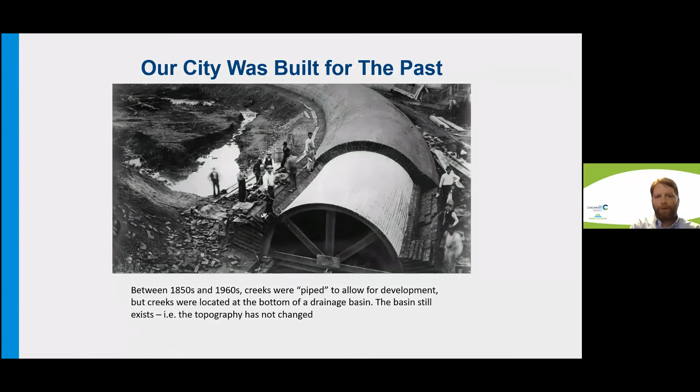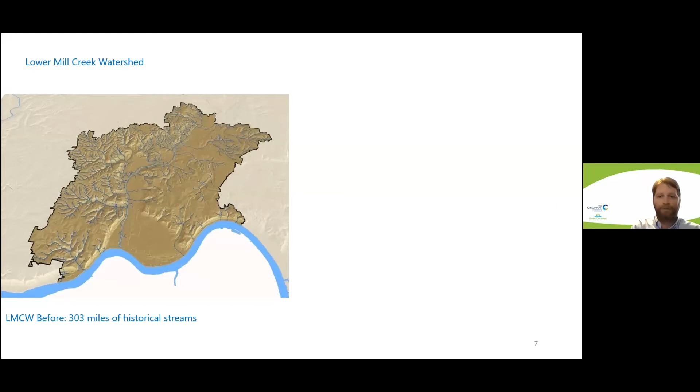So here what you're looking at is a picture of the Mill Creek watershed. This image highlights the change in time of our streams. Before development, this area contained over 303 miles of streams that would funnel the water into the Mill Creek and into the Ohio River. Currently, the lower Mill Creek watershed contains only about 75 miles of streams, an almost 75% reduction. When water falls now, much of it is diverted into these existing sewers and stormwater infrastructure.

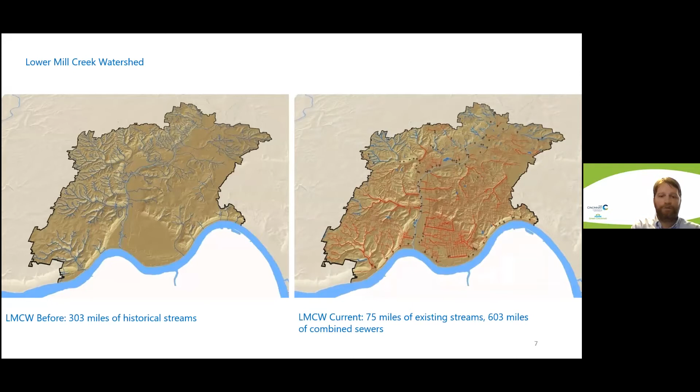Next slide. We have also changed our environment even more by drastically increasing our impervious surfaces. In this image, the gray represents pavement, parking lots, buildings, and the green represents the city's tree canopy. Places with natural ground cover absorb significantly more rain than places with impermeable surfaces, where the rain cannot be absorbed by the ground and therefore must flow downhill until it reaches a place where it can either be diverted or absorbed.

This increase in impervious surface is essentially increasing the amount of water that our creeks and sewers must handle in a rain event, and it can lead them to be overwhelmed in times of high rainfall. This difference in surface type, this built infrastructure, this topography of our land means that the threat and impact of extreme storms are different on a street-by-street level. Next slide.

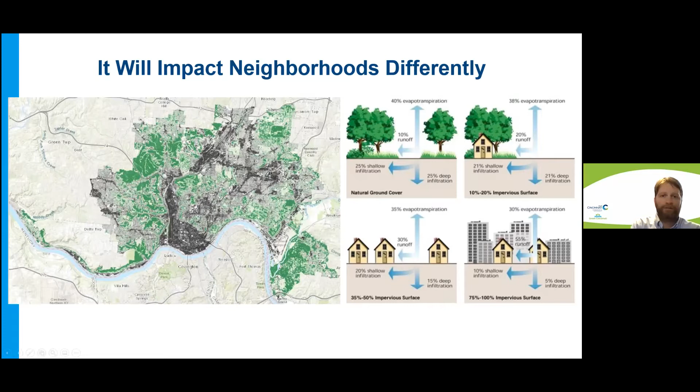In addition to our built environment, the environment it was built for is changing. A rainstorm and heat wave is different than it used to be. Cincinnati's climate is changing, and all data points to a city that more closely resembles Little Rock, Arkansas in the summer and Washington, D.C. in the winter. Cincinnati's average temperature has already increased 2 degrees since 1950, and it's anticipated to increase another 7. Our rainfall has already increased 13%, but what's most striking is the impact of extreme weather.

The warmer air is holding more water. We are giving the storms a larger bucket. Our extreme rain events are dropping 35% more water than they used to, and they're occurring more frequently as well.

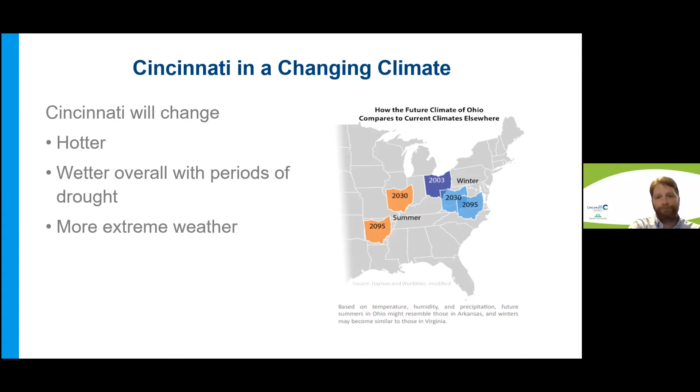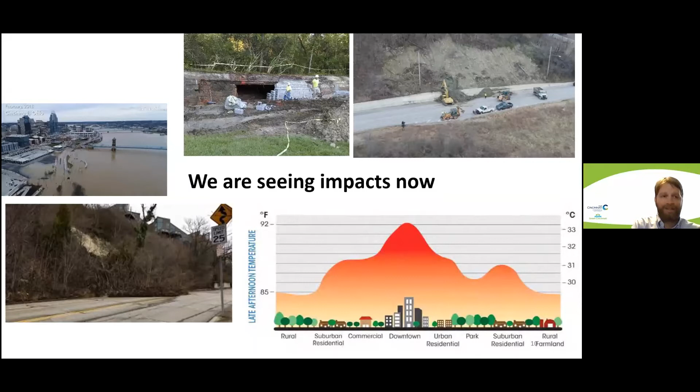Next slide. We are seeing the impacts of climate change now here in Cincinnati. The increased rainfall is causing flooding, landslides, and hotter temperatures in our urban core, where it heats up during the day and is unable to cool down at night. Next slide.

Hamilton County has seen a significant increase in our 100-year storms, or the largest 1% storms, in the last 10 years. Here are images of storms over the past decade. The lightest rain is in green, and the more intense storms are red to purple. What you notice is the small, powerful microbursts of rain - the purple, the red, the deep red - that occur fairly randomly throughout the county. When these microbursts combine with the topography, the infrastructure, and the surface type, this is where localized flash flooding is likely to occur.

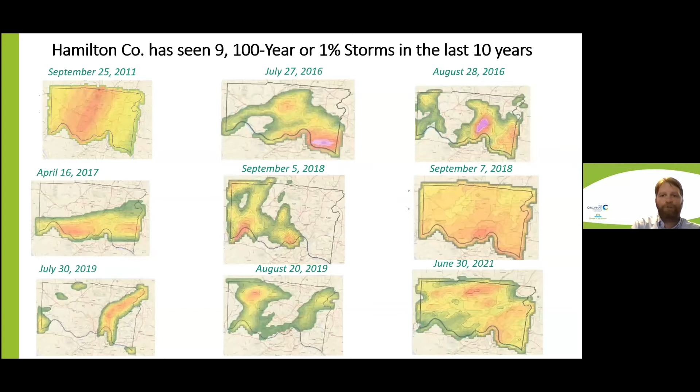Our current system just becomes overwhelmed and it cannot move the water fast away enough. While we can build and improve, and the departments here will share with you what we're doing, we can't build our way out of every storm. So what will we need to do here?

First, the city of Cincinnati needs to do its part to reduce our own carbon footprint. The 1,000 acre solar array currently being built 40 miles east of Cincinnati is an excellent example of us doing big projects to reduce carbon emissions and save taxpayer dollars.

Second, we must gather data around the vulnerabilities of our city in a changing climate. We have conducted studies that analyze heat, tree cover, surface type, landslide threats, but we're also looking at our demographic and income data and how that relates to climate vulnerability. We know that our neighborhoods in our city will not be hit equally, and we also know that the impacts on individuals will not be equal as well. The University of Cincinnati is currently working with us to develop a report that will analyze how these issues affect us on a neighborhood level, and we hope to get that published soon.

We must engage the public to understand that what once was is changing. We must engage people in events like these to provide education and outreach around how to address extreme weather and how to assess the potential impacts on your home and your business. Everyone on the coasts knows the steps to take to protect themselves when hurricanes come. What does storm preparation look like here in Cincinnati, and how do we share our messages here with our residents?

In August of 2016, we had a rather significant storm event, and as a result, over in the Grandin area, we had a construction site that ended up turning into almost a mudslide coming down the hill. That event caused the city to go back and relook at how we were doing our development process.

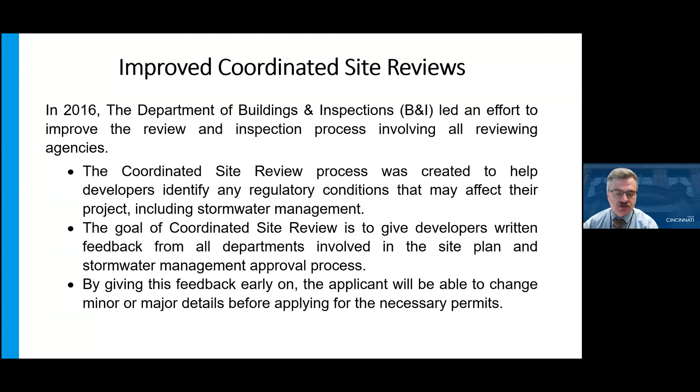Through those changes, we created what's called a coordinated site review process, in which virtually every department involved in development—fire, police, MSD, SMU, DOTE, Buildings and Inspections, planning—will look at projects together. We make sure we're giving good direction to the people proposing the projects, and we look for places where we may be giving conflicting information so we solve problems early on during the paper review process, before we get into construction. A coordinated report goes back to the developer, and they make changes to ensure their project can be successful. Next slide, please.

In that process, not only B&I but especially SMU and MSD are evaluating each project, not only for system capacity but also what kind of grading changes are being proposed, how that changes drainage patterns, and making sure we don't have increased impacts on surrounding and downstream properties. Next slide, please.

Buildings and Inspections has spent a great deal of time with SMU, and we've developed a collaborative approach where we perform many of the inspections in partnership with SMU, being the inspector in the field for many of those things. Part of that was to make sure we were sending a consistent message in the field, while also utilizing the size and scale of our department's inspection unit to manage projects more effectively.

One of the things we do is when we know a storm is coming in, we have inspectors go out to many of the challenging sites and look at the erosion sediment control features, making sure they're tight. If they're not tight, we immediately give the developer instructions on how to tighten them up so they perform best when the rain event occurs. Likewise, we do post-storm evaluations so that if there were problems with erosion sediment control, they get refreshed or redone, in case there's a second event right behind it—we're ready for that.

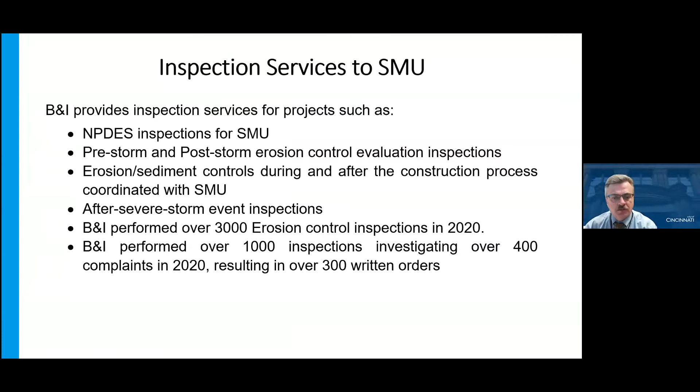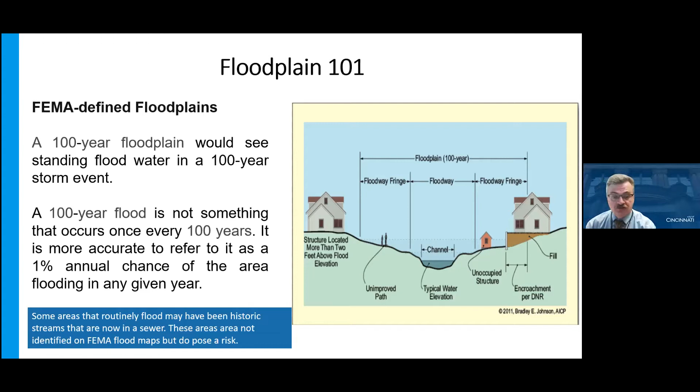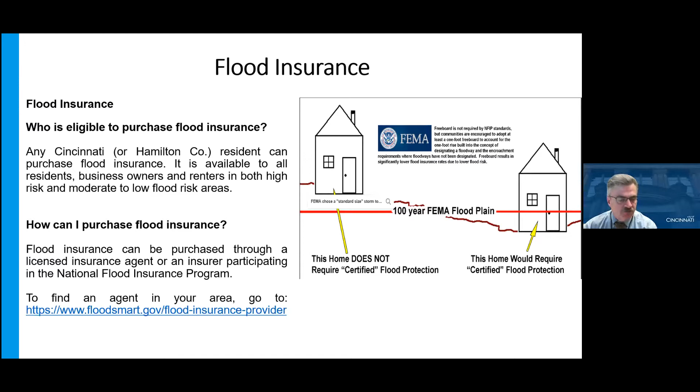So a little bit about flood insurance. As was stated earlier, the City and Hamilton County are participants in the National Flood Insurance Program. As a result, any resident can purchase flood insurance. They don't necessarily have to be in a high-risk floodplain area to get that insurance. We know some of our minor streams which flood have impacts on property, so flood insurance can be done. While it's part of the national program, you go through an insurance agent who can support you in getting flood insurance.

Flood insurance works in a couple of different ways. You can get flood insurance just for the structure, or for structure and contents. Renters can get content insurance even if the property owner doesn't get it. The policy is in effect whether or not a federal disaster declaration is done; that doesn't stop the policy from paying out. Like any insurance program, it has a number of limitations, so anyone talking to an insurance carrier should keep that in mind.

For what we call high-risk areas, when you look at a FEMA map, those are the areas designated A or V, there's a 1 in 4 chance of flooding in the 30-year life of a mortgage for those high-risk areas. Government-backed mortgages require flood insurance in those high-risk areas. Likewise, depending on the policy, the amount of coverage and whether it's covering just structure or interior will vary.

And finally, questions about flood insurance. The best source, of course, is FEMA, and we have an internet address you can go to, and they go through a whole series of questions that can provide you some basic information.

Okay, Eric Saylor, thank you, Mary Lynn. Good evening, everyone, it's my pleasure to be here with you. I'm going to talk for a few minutes about the City of Cincinnati Stormwater Management Utility. Next slide, please, Mary Lynn.

So just to summarize SMU's roles and responsibilities, taking this from the city code, it's our responsibility to manage and finance a public stormwater infrastructure within the City of Cincinnati. And I think that's an important distinction to make, for instance, between us and our sister utility MSD, in that we are specifically within the City of Cincinnati, whereas MSD goes outside of the city as well.

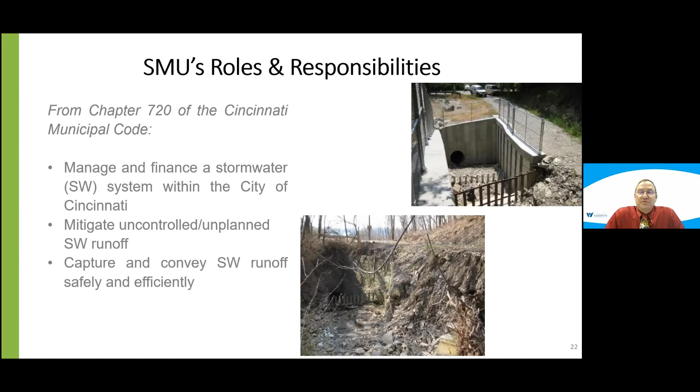It's our job to help try to mitigate uncontrolled and unplanned stormwater runoff, to do the best possible to capture and convey that stormwater as effectively and efficiently as possible to protect our businesses and all of our customers. Next slide, please. So I'm going to talk a little bit, at a high level, about some of the infrastructure that we maintain in dealing with that collection and conveyance of stormwater and flood protection as well.

Next slide, please. All right, so as you see on the left here, this is our flood control infrastructure. The Mill Creek Barrier Dam is a piece of infrastructure that a lot of people know about. You can get a lot of information on that at our website. You also can see a really cool drone video of it in operation. The Barrier Dam, along with the adjacent flood protection infrastructure, was finished in 1948 to address the 1937 floods. It protects about $3 billion, with a B, of public and private infrastructure, railroad lines, residents, businesses, and the region's largest wastewater treatment plant, the MSD Mill Creek plant.

Given that it's an important piece of infrastructure, we take it very seriously. And as far as mitigating the risk associated with that, in 2014, we completed a facility plan. And since then, we have been doing a lot of capital projects, which I'll touch on at a high level in a couple of minutes. And we have 4 full-time staff there that perform year-round maintenance.

Art mentioned the FEMA certification associated with the city. This is very much tied to that. The Army Corps of Engineers inspects this infrastructure most of the time on an annual basis. They've always given us a good grade, but if we don't pass that, we are in danger of losing that FEMA certification. We certainly don't want that to happen. So it's a very important piece of infrastructure.

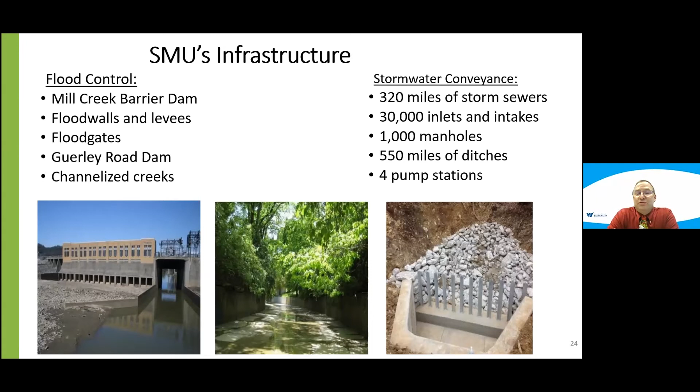We have an earthen dam in the Guerley Road and Sunset Avenue area. We have 3 channelized creeks: one in Roselawn, the Amberley Creek; one in Northside, the West Fork Creek Channel; and one in Madisonville, the Duck Creek Channel. On your right, you will see a summary of our stormwater conveyance that we operate and maintain with our staff and with contractors as well. Next slide, please.

So I often get asked this question. I know MSD does as well. It's an excellent question. What's the difference between SMU and MSD? MSD will touch on the difference between a sanitary sewer, a combined sewer and a storm sewer in a bit. But as far as SMU goes, if you see the picture down on your left, it's a typical situation where you see an inlet in the street, and that inlet in blue conveys the water to the MSD combined sewer, which you see in green there. So we are responsible for the inlet and that connection, and MSD has the responsibility for the combined sewer.

We also deal with erosion control, as Art mentioned, and work very closely with them. And I'll touch again on that in a second. And the flood control that I mentioned, with all of our flood protection infrastructure in the creeks, and especially, of course, the Ohio River, being we are certainly a river city.

MSD, on the other hand, deals with sewage. So we are specifically stormwater. They deal with the sewage and the combined and sanitary sewers. They deal with verified sewer backups, the green infrastructure that helps them with their combined sewer controls, and the treatment of wastewater at their 7 treatment plants. We work very closely with them on projects and maintenance operations as well, serving our mutual customers. Next slide, please.

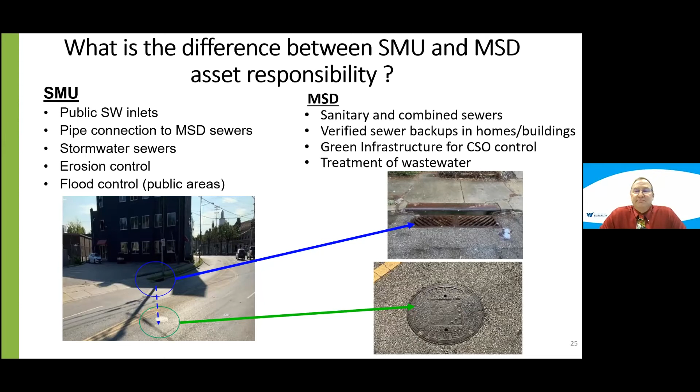So I'll talk a little bit about flood control. And this happens not only with the Ohio, but also within our local community as well. Next slide, please.

So the first one I wanted to touch on is the one that's on most everybody's mind probably with this meeting, and that's overland flooding. So our responsibility is to take that stormwater, kind of what I mentioned in the beginning, and properly and efficiently and safely convey it. And that will go to either a combined sewer, the MSD sewer, or a storm sewer, or a natural system, whether it be a swale or a creek or river. So a lot of challenges associated with that.

We are a built out city. As Michael mentioned, we're an old city. And so it becomes a challenge: where are you going to take this stormwater to? Soil is not always conducive to infiltration. You can get stretches in the wintertime where our ground is frozen and there is nowhere for that water to go if we get a heavy rain other than our sewers. Same within the summer, you get a long stretch of hot weather, get that ground that we all see cracking in our yards and around our houses, and it can't infiltrate.

The topography that was touched on earlier too. It's very challenging as far as the Queen City and the county is concerned. It's not like we're flat like Florida or anything like that. We have a lot of hills and it's beautiful, but it also makes it challenging to manage as far as stormwater is concerned. We sit at the bottom of the watershed. We get a lot of other municipalities and even other county stormwater being brought to us. Goes back to that regional piece of infrastructure that the city alone finances, the Barrier Dam.

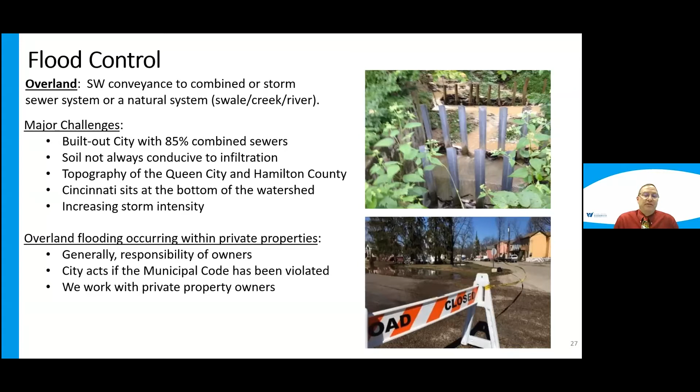Maintain your private infrastructure. We react to all calls that come to us and investigate to determine if it's a private property matter or a public property matter. And we'll have our phone number up in a minute and our email. So don't hesitate to call us. If you call us or email us, we will respond and investigate, including with boots on the ground employees. Next slide, please. Go ahead and click it again, please.

So the next flooding that we often deal with are creeks, our city-owned creeks. I mentioned Duck Creek and West Fork Channel Creek and Amberley Creek, conveying that stormwater runoff, and the Ohio River with the Barrier Dam and the flood walls and floodgates, an occurrence that's happening more frequently. We've noticed that in the last 5 years. Next slide, please.

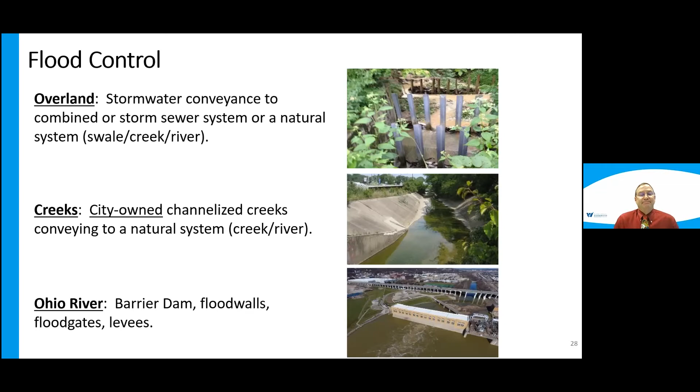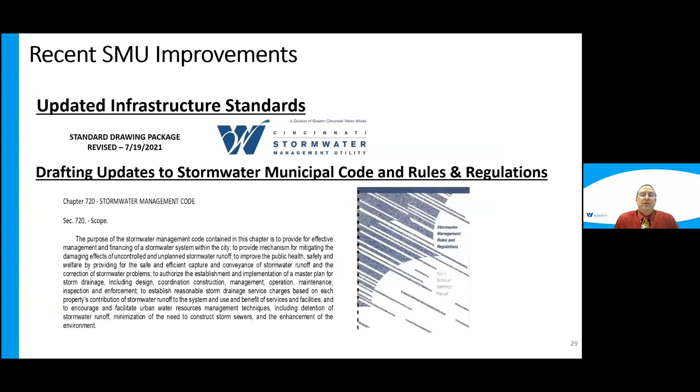Some recent improvements. We updated our infrastructure standards just literally a few weeks ago, really making it easier for us to maintain our infrastructure and effectively capture that stormwater. We're in the process of internally updating our municipal code of the city and our rules and regulations, making us greener, and also improving our detention rules and regulations to help us deal more with those intense storms that we've talked about. Next slide.

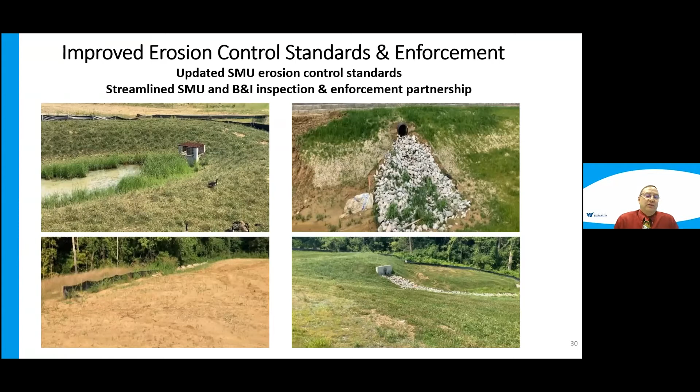Art mentioned this. We updated our erosion control standards and then formed a strong partnership with B&I. And my thanks to Art and his staff. This has been really one of the true success stories, in my opinion, of SMU in the city in the last few years here. We have done a really good job with that. You get a 100-year storm, are you going to still have issues? Of course you are. But we have really minimized the effects of that. And my thanks to Art and his staff for helping us on that and partnering with us.

Next slide, please. So we also do some post-construction detention inspections in the storm-only area. I think this is important, and maybe some people will often overlook it. Things get built and then we don't turn aside and ignore them anymore. We go out and inspect them on a regular basis to make sure that the owners are maintaining them, so flooding doesn't occur for lack of maintenance. And we have enforcement mechanisms in place to deal with that if that's an issue. But thankfully, we have found that residents and property owners are doing a great job of this. And if you're one of those, keep up the good work. Thank you. Next slide.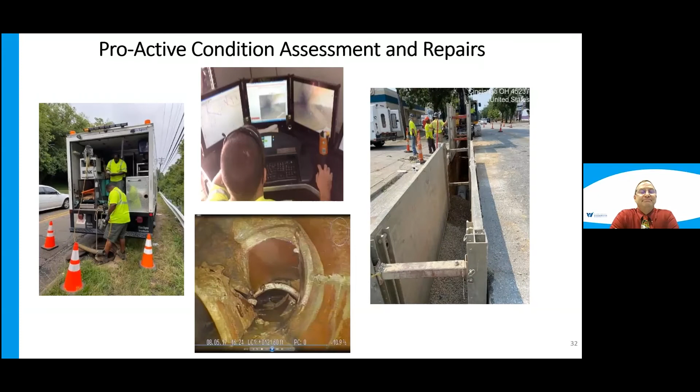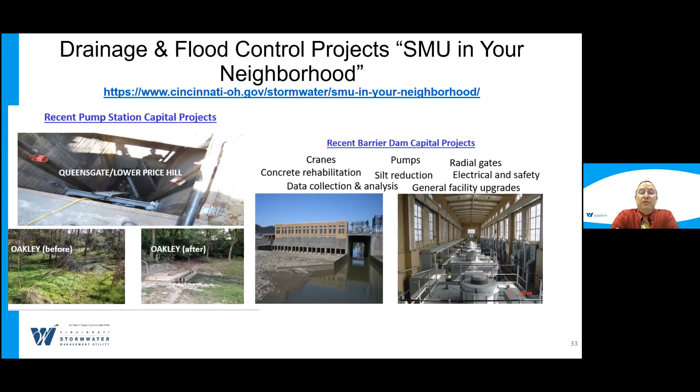So a little plug for our website. You can go to our website and you can see some projects in your neighborhood. And these are just examples of that. Our pump station projects that we worked on in the Queensgate, Lower Price Hill area. See a project there, a pump station, before and after pictures of Oakley. You can see just the difference it makes and it reduces the risk of flooding to our customers. Our Barrier Dam projects that we have done, that are ongoing now and that are coming. When a facility has been built in 1948, you have constant work that needs to be done. And my thanks to city leadership for recognizing how critical this piece of infrastructure is to everyone and to the region itself. Next slide, please.

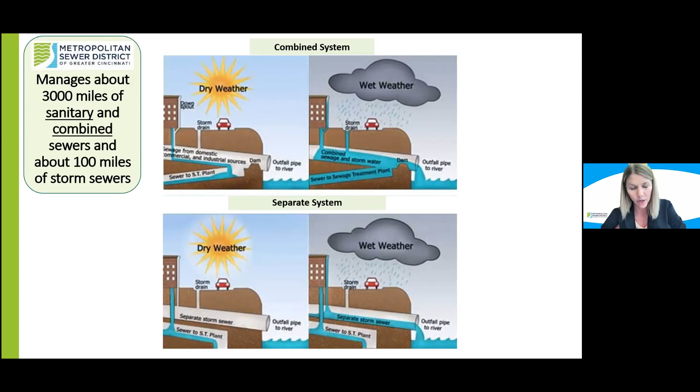I think as many people have heard, MSD is under what is called a global consent decree. This really started in the 1970s with the enactment of the Clean Water Act. Many cities with older systems needed to start bringing that infrastructure up to current standards, recognizing that overflows were causing pollution into our streams and rivers. So as we have new regulations but old systems, it's recognized that this can't be done overnight, and it's very costly to change our infrastructure.

So the consent decree is really a common enforcement tool that many cities are under something similar to. Without getting into too much detail, the most important issues I wanted to share about the MSD consent decree is that the primary focus is to reduce or control our combined sewer overflows, and to eliminate overflows from a sanitary-only system. The consent decree also established a sewer backup program, which we're going to talk more about.

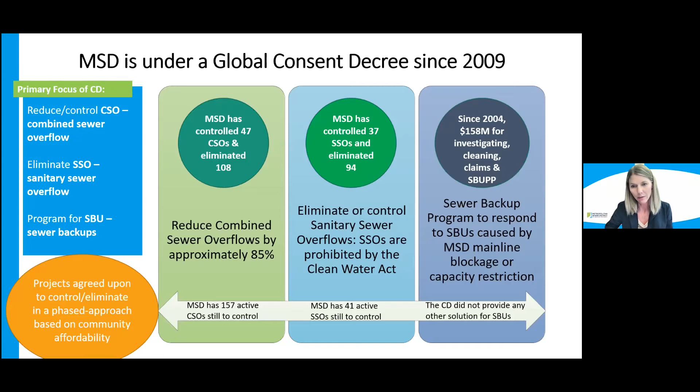And again, the sewer backup program is what I'm going to talk more about on the next slide. The sewer backup program was also created from the consent decree, recognizing that in addition to combined sewer and sanitary sewer overflows during wet weather events, our older infrastructure also has capacity limitations. In extreme storms especially, there will be backup of wastewater into a property if the main sewer doesn't have enough capacity to convey that flow—similar to the combined sewer overflow we shared on the prior slide.

So the sewer backup program, recognizing that this can occur in people's homes, required MSD to do three things. The first is to have a customer service response program so that when an individual had water in their basement, MSD would be required to respond, investigate, and clean up that sewer backup if it was determined to be caused by inadequate capacity of our sewer system.

The program also covers any negligent operation of our public system. But importantly, what it does not cover—and in fact the consent decree specifically excludes—is any sewer backup caused by overland flooding that did not come from MSD's sewer system, or any blockage or failure of an individual's building sewer. So to be eligible for our cleanup and the two additional components, it has to be an eligible backup under that program, or else MSD cannot address the problem.

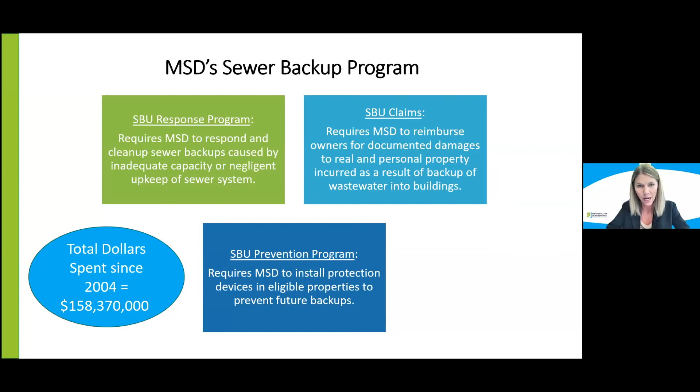As you can see, the total dollars spent on this program since it was established in 2004 is over $150 million. That is a large amount of money. If you go to the next slide, it'll break down how those dollars have been spent on this program.

Those numbers, quite simply, aren't sustainable. The county commissioners continue to budget for the SBU program, and we continue to perform as required. But it is certainly apparent that the amount of money we are putting into this is not really providing the results that I think the community and MSD want to see from our investment. So we really want to find new solutions. If you can go to the next slide, I have more to demonstrate on the existing program.

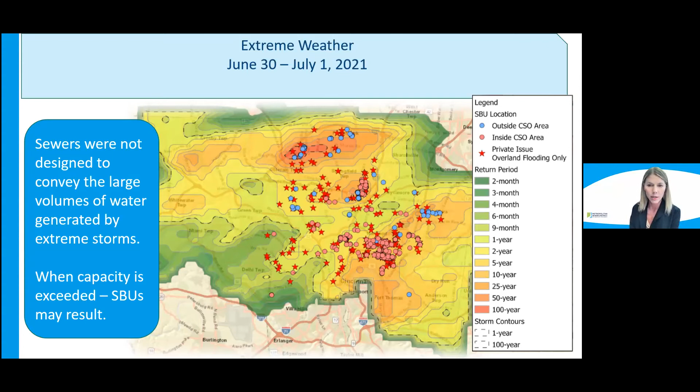We're calling this an extreme storm because of the recurrence intervals — some areas saw over 100-year events, and a lot of areas saw a 50 or 25-year storm. Our sewers simply weren't designed to convey flow of that magnitude. I think this storm is also a good example of why we can't build our way out of this problem, because sewers today would not be built to manage this flow even with new systems. That's what's apparent as you see sewer backups also occurring in separated areas. Next slide.

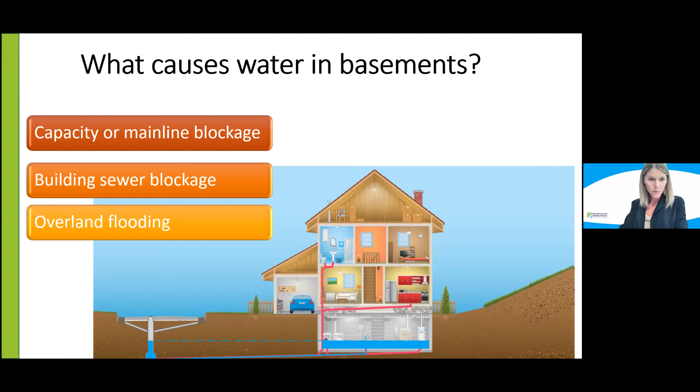So this is really the steps in our process. First and foremost, how we make the determination of the cause of the sewer backup - first, we need you to report it. MSD does not know that a sewer has backed up. I think there's sometimes a belief that we would somehow know where the system is surcharged, but it requires calls from you when this happens. We can take calls any time of day or night, 24/7, to our hotline - it's 352-4900. You can also report a sewer backup on our website.

Once that is called in, then we create a work order and have a dispatcher assigned to get out to that property as quickly as possible. The crews that come out to the sites will investigate the main sewer by inspecting the upstream and downstream manholes, looking for signs of surcharging - this can be debris that's evident inside the manhole. We also have float level indicators installed in many manholes throughout our system, and in some properties we also have a clean out on your building sewer lateral that may also indicate whether there is a surcharge.

Although in the last year we have limited entrance into homes, our crews will typically also go into the home and investigate the damages from inside the property. But typically the determination is made based on the upstream, downstream manholes and additional evidence outside the property.

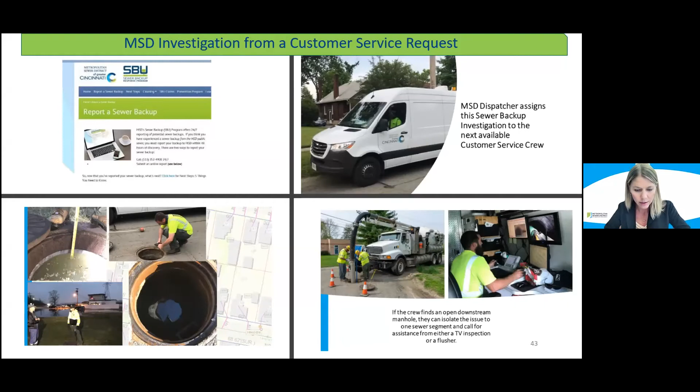Once the crews are finished with their work, we have a supervisor that will review all of this information, and they will also be able to compare it to additional investigations taking place in the area to make sure that everything was properly evaluated. So that's the follow-up review.

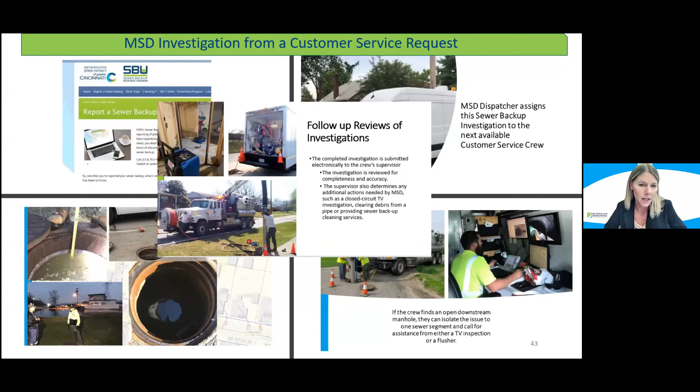Sometimes we may need to go out and do additional actions - we may need to actually investigate by doing a TV investigation of the sewer, again clearing debris. And if it's an eligible SBU, we will provide cleaning services. Finally, our response times are tracked, and it's our goal to get to properties as quickly as possible. We really want to get there within an hour if possible. In some of the larger storms, we do see longer times, sometimes more than 4 hours, but as you can see, our goal and our performance is typically less than 2 hours.

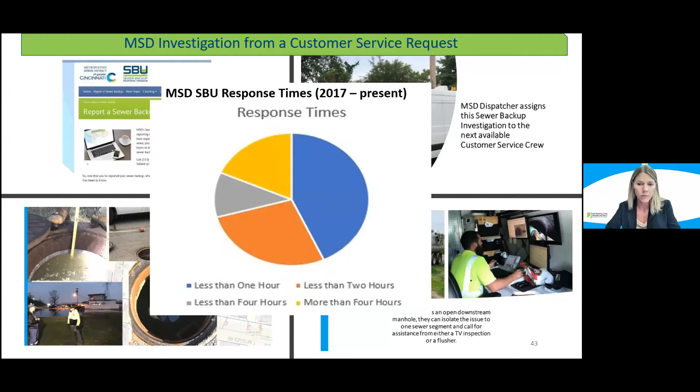Now, I wanted to reiterate a little more about overland flooding and what we've seen in many of these storms. Properties that have reported a sewer backup have a lot of water inside and outside their home, but it is not a qualifying sewer backup. To be clear, MSD will respond to all calls that come into our hotline, and we will make the determination as to whether or not the sewer surcharged or contributed to the water in the basement.

Some of them, there may be another jurisdiction, the local stormwater utility. So for MSD, if we're in the city of Cincinnati, we will work with the stormwater management utility and Eric, but in other jurisdictions outside the city of Cincinnati, it may be a different stormwater responsibility. Most importantly, MSD cannot spend our dollars, and we cannot address these issues because we do not have the authority to respond to problems that were not a result of our sewer and capacity.

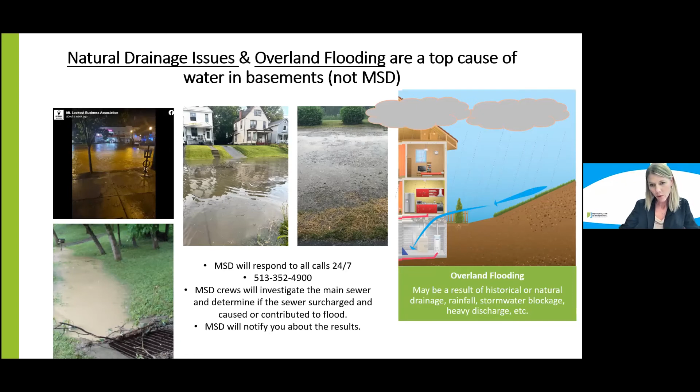So what are we doing? And this is where, as we wrap up here, I think a lot of the comments I saw before I started speaking show that everyone wants to know what we are doing differently if the current program isn't preventing and isn't providing solutions for everyone.

MSD really is trying to enhance our sewer backup program and look at things differently, given the resources and the cost of the program to date. We understand that if we continue to solve problems the same way, we aren't making a lot of progress in certain areas. So here are some of the different approaches we're looking at.

The East Side SBU mitigation study. This is something that was just initiated this year. This is really doing a deeper dive into the sewer backups that have occurred in areas of the East Side where we don't have an existing project that would address the sewer backups in these neighborhoods.

Instead, the default solution, as I mentioned earlier, is really just to address these property by property after they have 2 or more sewer backups, and then go in with a solution just for that individual property, installing a prevention device. If we do that, sometimes in these concentrated areas of sewer backups, we may actually make the problem worse for other properties in that same local community.